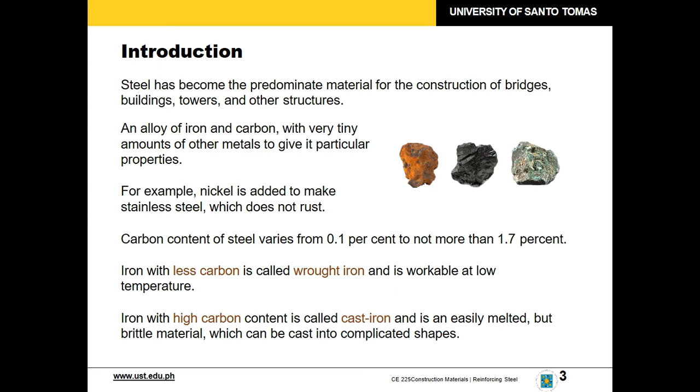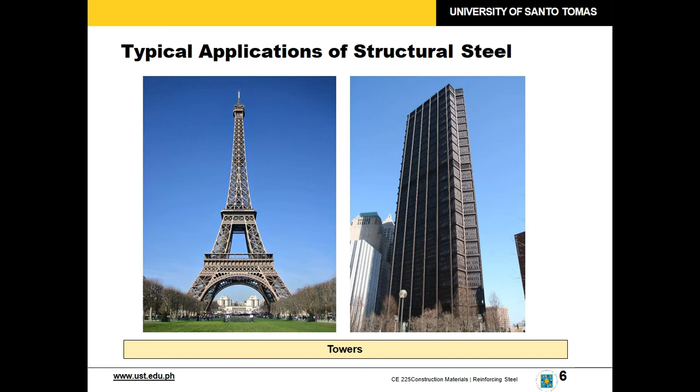And iron with less carbon and iron with higher carbon content as components of your steel. So some applications: your bridges, museums and buildings, high-rise and low-rise, your towers, so the Eiffel Tower, mga transmission lines. Yan. Early history of iron and steel.

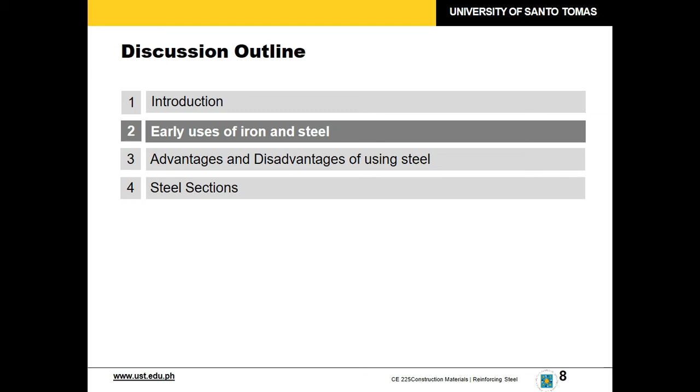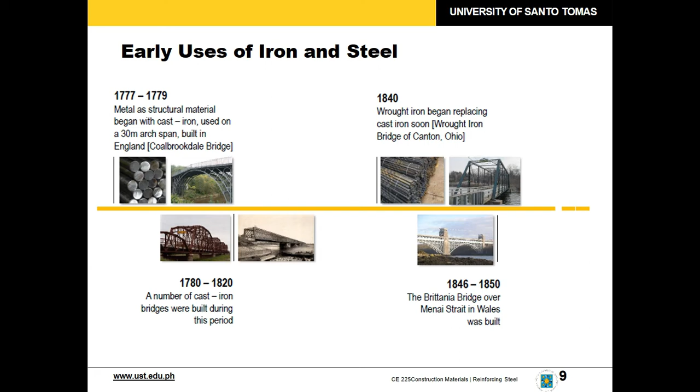Metal as structural material began with cast iron. So, mga bridges din, from the 1700s to the early 1840s. So, puro bridges ang application. So, we can realize here that we maximize the use of steel sa mga bridges. In 1855, development of the Bessemer process for large quantities and at cheaper prices. And in the 1900s, 1989, different shapes.

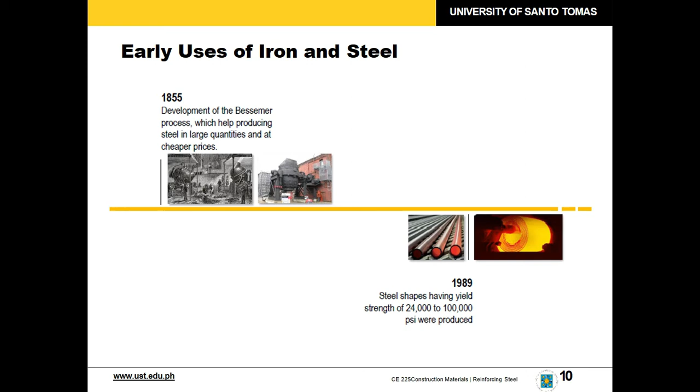So, advantages and disadvantages of steel. So, the same as your reinforced concrete or reinforcing steel, almost the same properties. High strength of steel per unit weight. So, you have also your variation in strength per length. No? This means dead load will be small. Uniformity, it's also monolithic. Properties of steel do not change appreciably with time as to reinforced concrete structures. Elastic and ductile, so it can be bent. So, meron tong actual formula from Hooke's law, but we'll be further discussing that in your mechanics of materials.

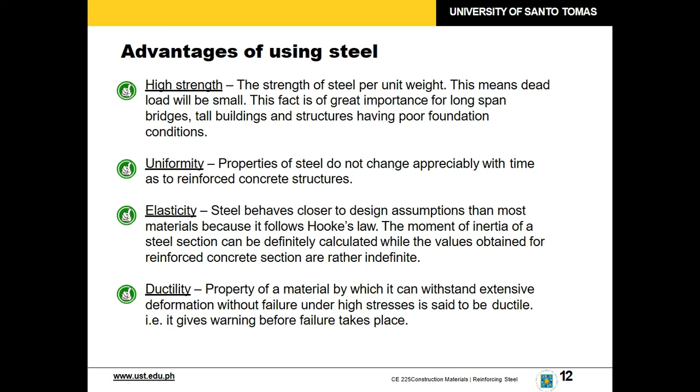So, it gives warning before failure takes place. Meron munang cracking na magaganap before actual failure occurs. Disadvantages of using steel: maintenance costs, so high exposure to weather conditions such as air, water, and humidity. Must be painted periodically in order for you to avoid rust and other chemical reactions.

Fireproofing cost, so steel is an incombustible material but the strength is reduced tremendously at high temperatures. Kaya pala, kapag nasusunog ang isang bahay, prone siya sa failure, di ba? Pwede siyang bumagsak pag hindi maganda ang mga steel material na ginamit. Susceptibility to buckling, ito yung mga nangyayari sa mga bridges, sa mga malalaking columns, pag hindi niya kaya yung dead load niya. Hindi niya kaya yung load na dinadala, nagbe-break yung mga columns.

Fatigue, the strength of a structural steel member can be reduced if the member is subjected to cyclic loading. And brittle fracture: it may lose ductility and brittle fracture may occur at places of stress concentration. So, pag concentrated, same thing with the columns, concentrated sa midpoint or sa buong area ang iyong weight or yung dead load, probability for fracture and buckling and other types of failure.

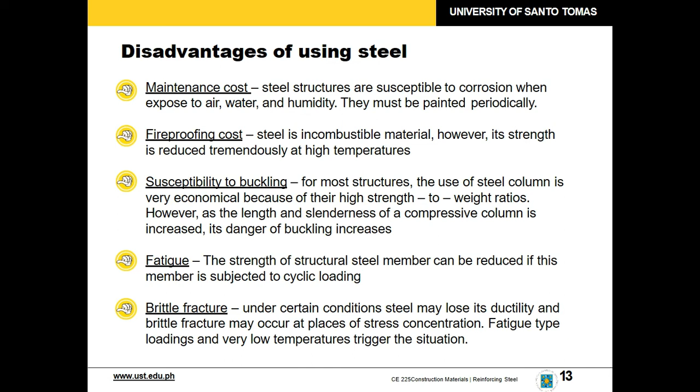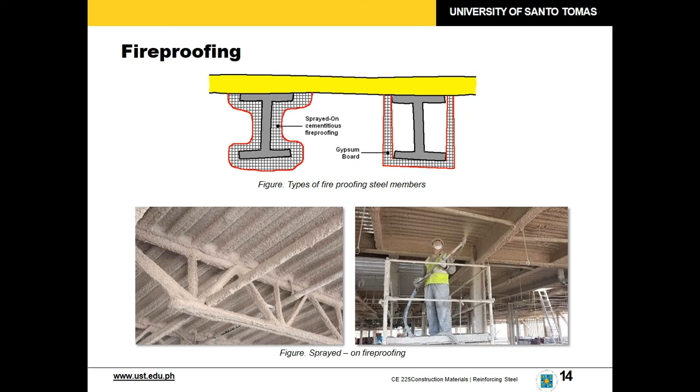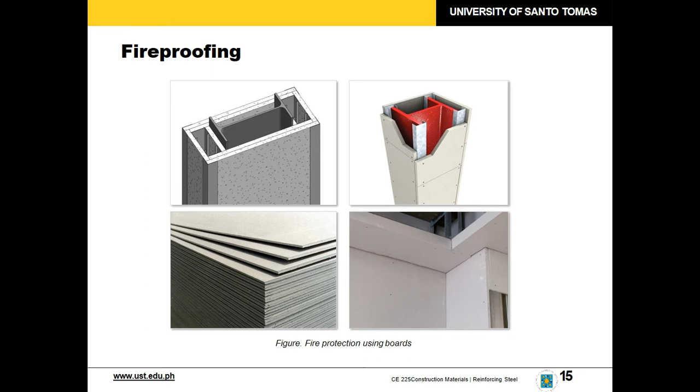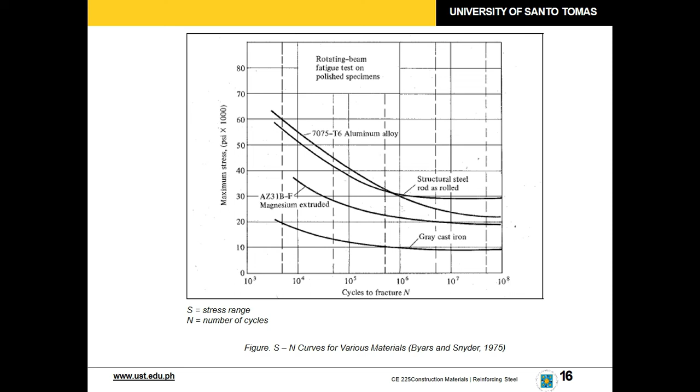Fatigue lamination, when steel more than 2 or 3 inches thick is used in beams of very long bridges or very high buildings. So, steel is fatigued by reversal of stress from tension to compression and vice versa when it's repeated many times. So, fatigue may result in failure of your structure. So, reversal of stresses.

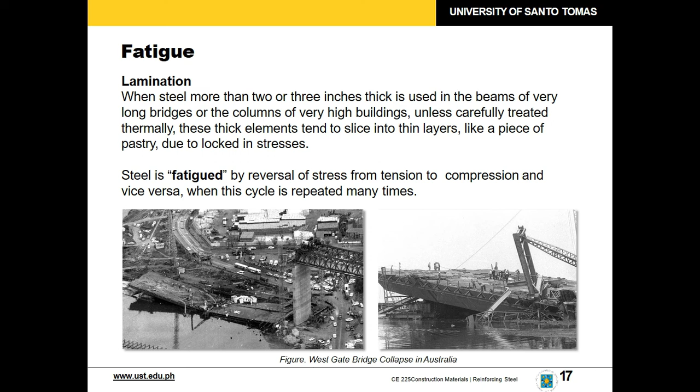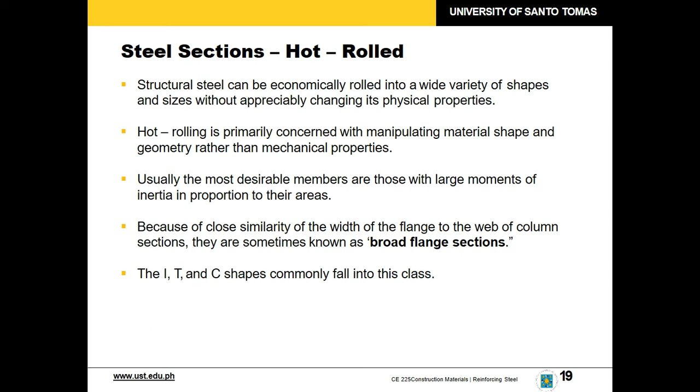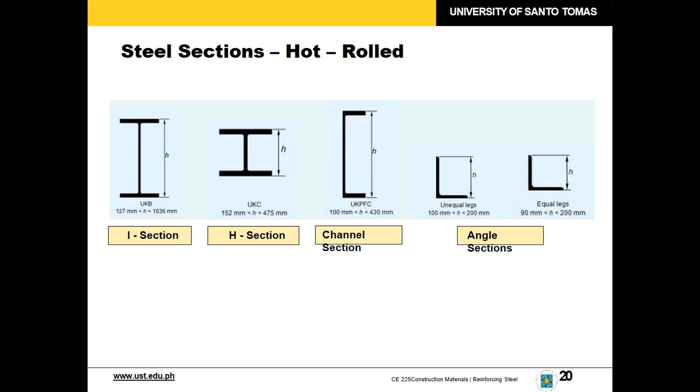And steel sections, so the most common are the following: I-beam, T-beam, and C-channels. So, these are your proper cross sections: I section, H section, channel section, and your angle sections. So, aside from this lecture class, typical applications muna: column, corbel, beam, brackets, framing, and your trusses. Your truss systems, I hope we have encountered this in your statics and further on in your mechanics and matrix analysis. So, yan, application yan. And for your steel design, of course.

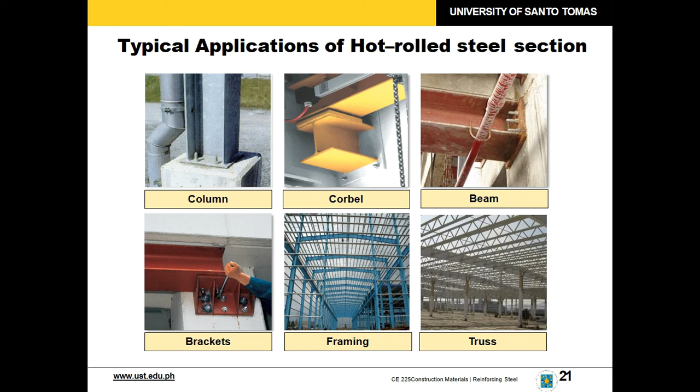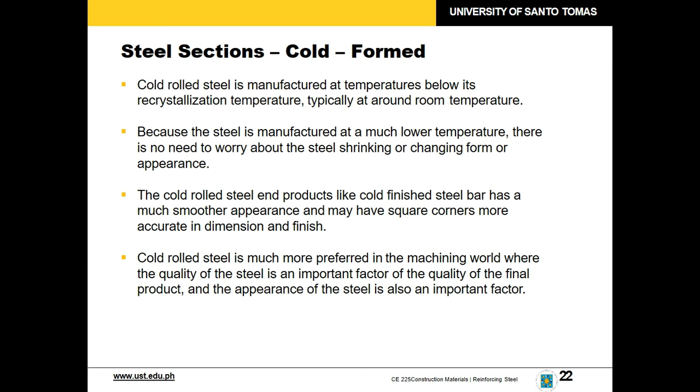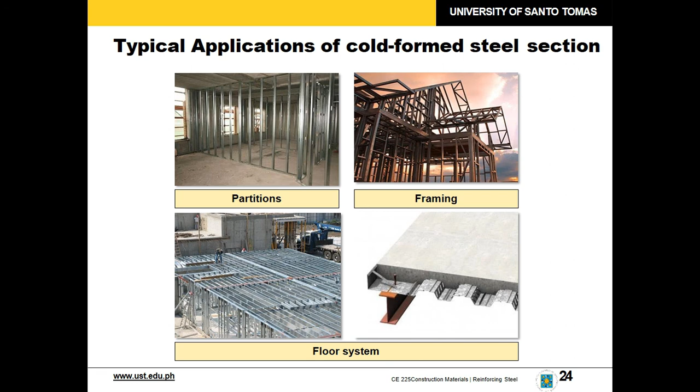So, for your cold formation, cold rolled steel is manufactured at temperatures below its recrystallization temperature, typically at around room temperature. So, samples. So, for small scale, no? Partitions, flooring system. Pero same din for framing, for roofing, and so on and so forth. So, in this video class, I'll be inputting also some videos for us to watch: how steel is formed, and yung hot formation and cold rolling.

And so, I hope you learned something from this very short lecture on structural steel.